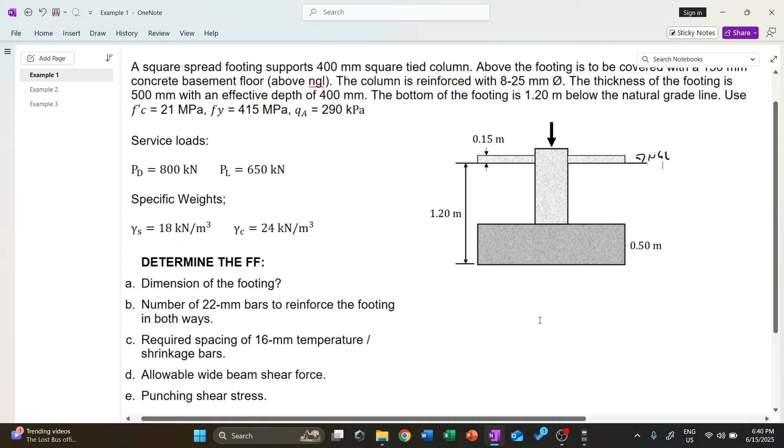For step number 1, we have to calculate first the effective pressure. To do that, we write: the allowable is equal to the effective plus the soil, the concrete, and the surcharge pressure. Given here is the allowable, 290 kilopascal. The effective is what we're solving for. The soil pressure we can solve.

We have 1.2 meters depth from the NGL to the bottom of the foundation, and 0.5 for the concrete. So we have soil with thickness of 1.2 less 0.5, or 0.7 thickness, which is 0.7 meter. So to get the pressure, that is simply gamma of the soil times the thickness of the soil. Gamma times height gives us kilopascal.

That is the pressure. Same with concrete: gamma of concrete times the thickness of the concrete. So let's substitute everything here. We have the allowable, 290, equal to the unknown effective plus the soil pressure, that is gamma of soil 18 times thickness of soil 0.7, plus gamma of concrete 24, thickness of concrete 0.5.

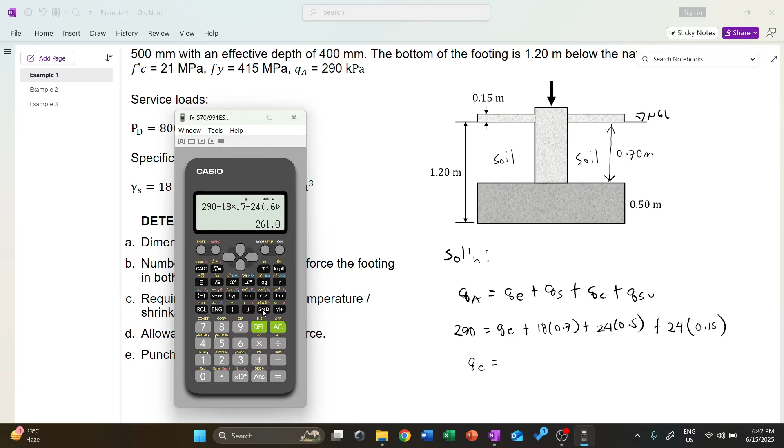So finally we can now solve for the value of the effective pressure. Let's substitute everything: 290 less 18 times 0.7, less 24 times - let me combine 0.5 and 0.15, so 0.65. Overall, we get 261.8 kilopascal.

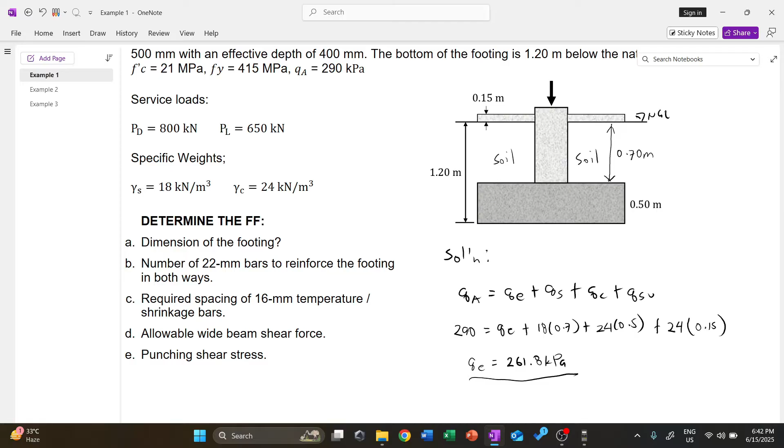261.8 kilopascal. So now we have the effective, and this is what we'll use to calculate the dimension of the footing. Now it says the footing is square, so we already know that side by side, S by S, will be its dimension. Now recall our formula for the area of the footing.

This is equal to the actual load divided by the effective pressure. Now again, our actual load here is the service load, since it's effective, it should be service load - meaning there should be no factor. So what are our loads or service loads? Given already: dead load is 800, then live load is 650.

So the area of the footing, let's call it S squared, since our footing is square, S by S. Then our service load is simply 800 plus 650, divided by 261.8.

261.8. Then, finally, we can get the dimension of our footing. So, the side is equal to what? We go straight to this: 800 plus 650 divided by the answer. This is simply the square root.

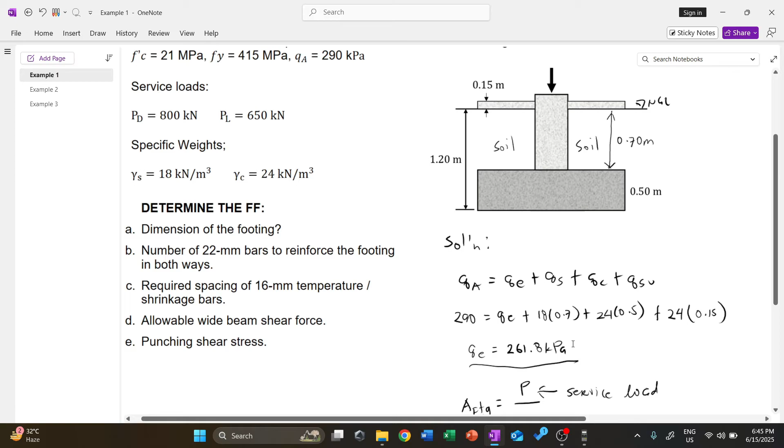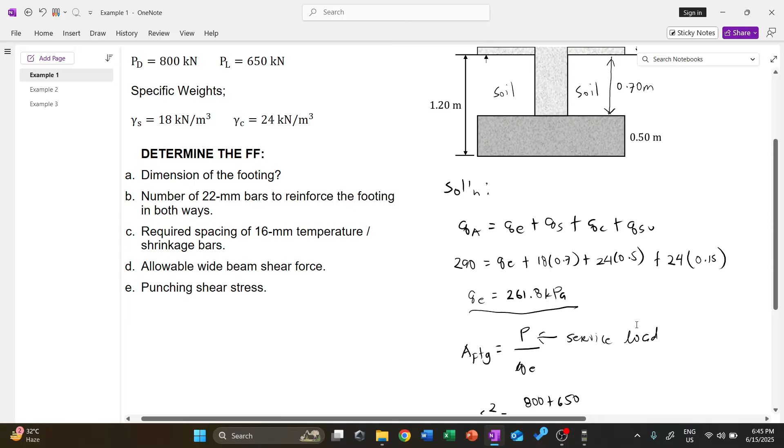Alright, next, the number of 22mm bars to reinforce the footing in both ways. So, step number 2 is to calculate the ultimate pressure that occurs here. This will have a QU pressure, if our actual load is PU here, if the actual load is at ultimate. So, solving for QU, let's put step 1 here, then step 2 on the other side. So the QU is simply ultimate load divided by the area of the footing.

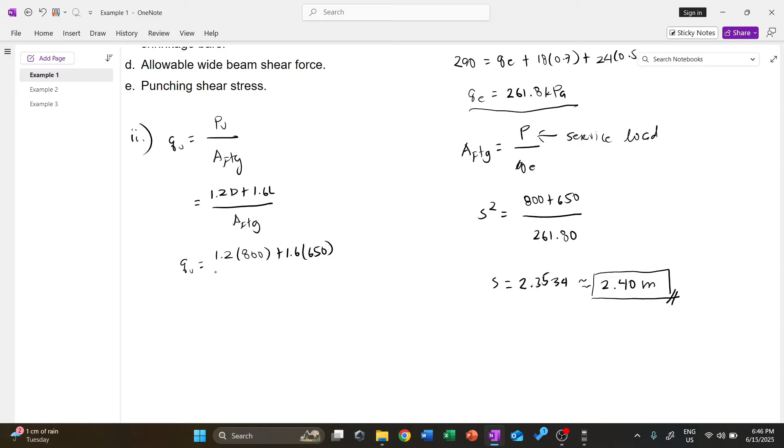So, our PU, to make it ultimate, is simply 1.2 of dead plus 1.6 of live, divided by the area of the footing. So our QU here is simply equal to 1.2 of 800 plus 1.6 of 650, then divide this by the area of the footing. Now, the area of the footing is not the original value, but the rounded one. Since we equated the dimension to 2.4 by 2.4, the area we'll use for the footing is of course 2.4 by 2.4, or simply this is now 2.4 squared.

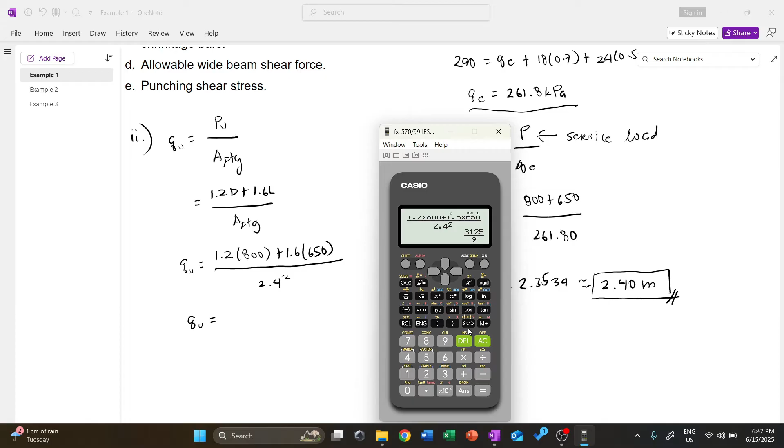So our QU depends on the final answer for the area. Now we have QU equal to, this is 1.2 of 800 plus 1.6 of 650, divide this by 2.4 squared. And then finally, we have 347.22, 347.22, this is in kilopascal.

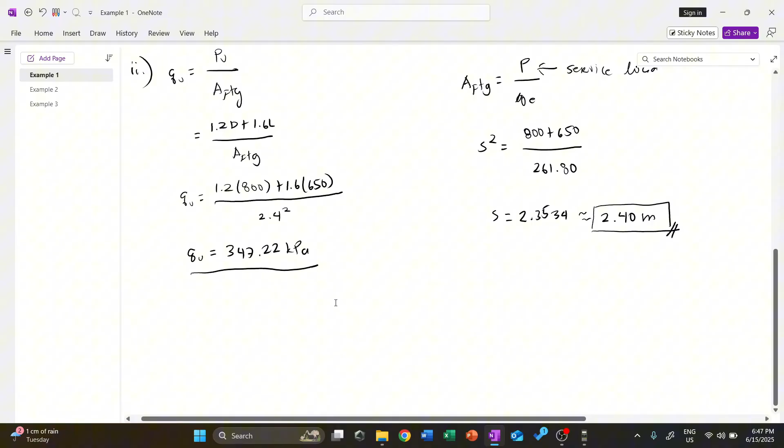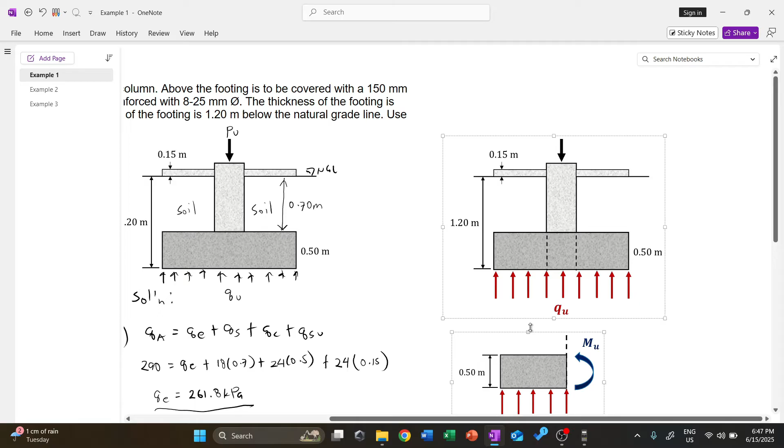So, for example, this is our QU. Let's just copy, or drag down rather. Let's put this in step number 3, so it's not hard to draw. Alright, so this is our QU. Let's put here the value, 347.22 kilopascal.

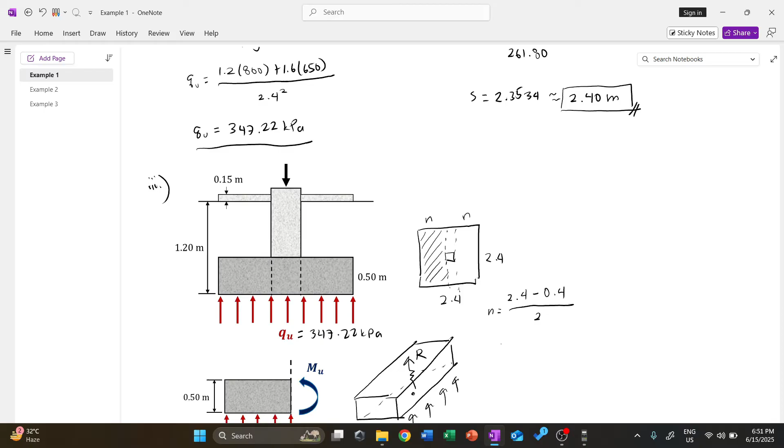Okay, so 2.4 less 0.4 dito, divide natin ng 2 dahil may n ka dito sa kabila. Actually, may n ka rin naman dito sa may kabila. So, divide natin ito by 2. So, 2.4 less 0.4, that is 2 divided by 2, that is now 1 meter. So, meron na tayo ditong n na 1 meter. So, again, ito yung side ng ating foundation. This is 2.4 meters by 1 meter.

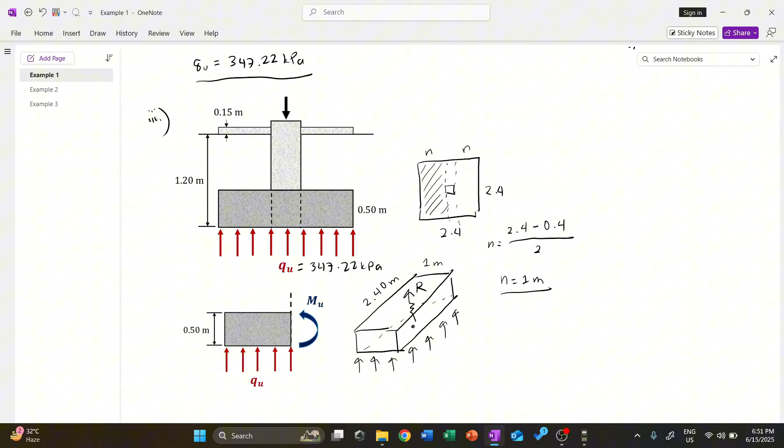Now, para makuha natin yung resultant, that is force, no? Okay, so for example, ito yung qu natin. We know that pressure or qu is simply equal to R divided by the area. Pressure is equal to force divided by area. Para makuha natin yung kanyang resultant. Okay, so R natin therefore is qu, that is 347.22 times yung area na 2.4 by 1 meter. Para makuha natin yung value ng resultant natin. Okay, so finally, pwede na natin kunin ang ating R, that is 347.22 times 2.4. Okay, so we have R 833.33.

833.33 kilonewton. Ito na yung ating resultant. Okay, now yung resultant na to, magmo-moment na yan dito sa ating critical section and then finally magkakaroon na yan ng MU. Okay, so dito po yung ating MU na yan. Kukontrahin ng MU natin yung resultant na yan. Okay, so yung R natin, saan ulit nag-a-act? Of course, nandito yan sa ating center.

Meron tayo ditong R. Alam natin na yung distance na to ay dahil nasa gitna yan, okay, nasa gitna po ng n over 2. Kanina nakuha na natin yung n, no? Yung 1. So kung n over 2 yan, dahil diyan nag-act yung ating resultant, therefore 0.5 yung kanyang eccentricity from our critical section. And then finally, pwede na natin kunin, no, yung MU natin. Okay, so yung mu natin dito is simply R times n over 2. Okay? So, nagmo-moment lang yung r natin dito sa ating critical section.

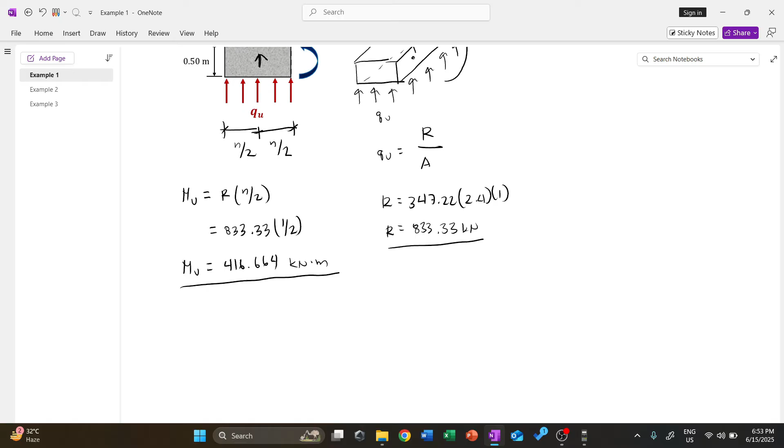R times n over 2, yung kanyang moment arm. Okay, so 833.33 times 1 over 2. 1 meter divided by 2 or 0.5 meters. So, finally, meron tayo ditong mu, na equal to 416.66. Okay, or lagay na lang natin lahat, 416.664 kilonewton meter. Okay? So meron na tayo ditong mu.

And then yung step number 3 natin or 4 rather, no? 4 na lang siguro. Diretso na natin. Skip na natin yung sa may checking of kung adequate ba yung ating section o hindi. Assume natin adequate ito. Tapos bakalan lang natin, hindi naman tinatanong dito sa problem. Okay, so yung ating mu, na-solve na natin.

Okay, step number 4. Solve na natin yung process. Mu is equal to phi Mn, ganito lang yan, di ba? Tapos, yung Mn natin dito is actually equal to 0.85 f prime c times AB, yung malaking b times d minus a over 2. Tapos makukuha na natin yung a dito. Now, idiretso na natin yung Mn natin dito, gawin na nating mu over phi. Pwede natin sabihin this is mu over phi is equal to 0.85 f prime c AB times d minus a over 2.

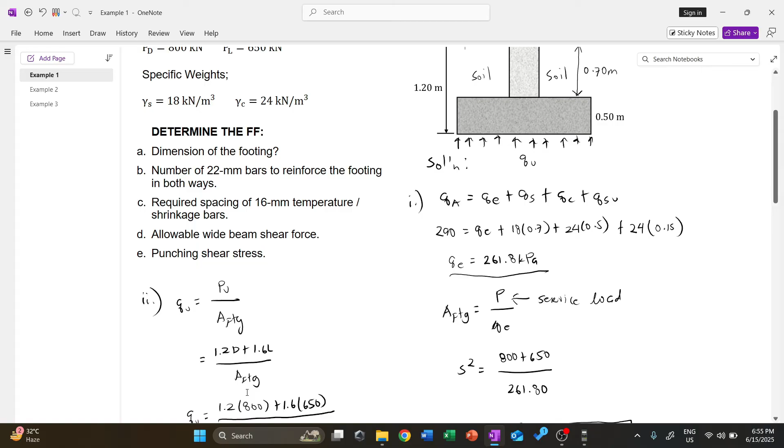Now, yung mu na natin dito, pwede na nating i-substitute everything. So, 416.664. Now, dapat ito ay naka-Newton mm, so gawin natin tong times 10 raised to 6. Divide this by phi natin dahil laging tension controlled. 0.9 is equal to 0.85, f prime c natin. Anong binigay? F prime c is 21, Fy is 415.

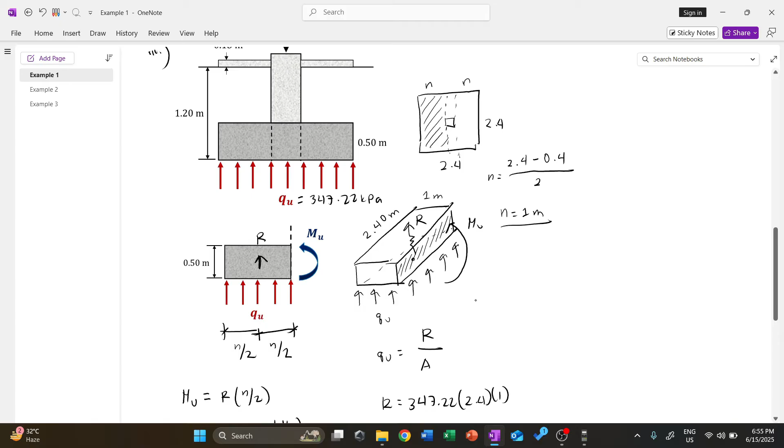F prime c is 21 times yung A natin is syempre unknown, no? Unknown yung A, and then ano yung B natin dito? Yung B natin dito is of course itong 2.4. Ito yung subject, ito yung babakalan natin. So therefore, yung width nito ang kukunin natin, which is yung 2.4. Okay, or gawin natin tong 2,400, para mm lahat din yung ating dimension.

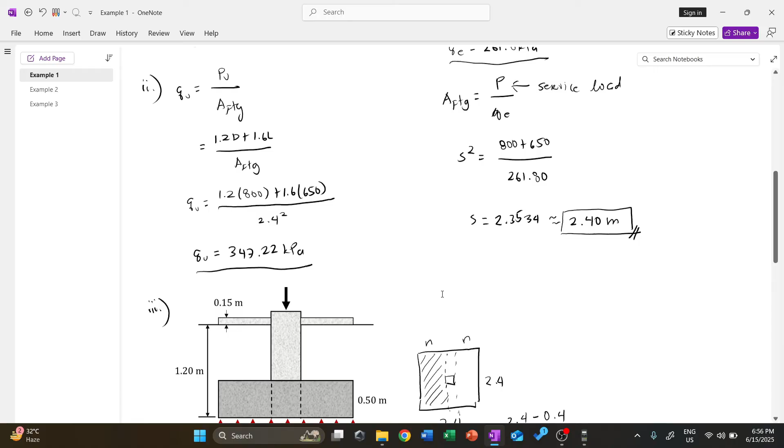Now, yung effective depth, ano bang binigay dito? Kapag may sinabing effective depth, yun yung gagamitin natin all throughout. Ang effective depth natin dito na given ay 400. Kung ano man ang tanungin, kahit ano lang ang tanungin, mu, one-way shear or punching shear, isang effective depth na lang yung gagamitin kasi may binigay na yung problem. So, this is now 400 less A over 2. Then, finally, pwede na natin kunin ano ba yung A natin rather.

Isimplify ko lang muna ito: 416.664 times 10 raised to 6, divide this by 0.9. Tapos yung side na to, i-divide ko lahat ng 0.85, 21, 2,400. Ilalagay ko na dito sa baba: 0.85 times 21 times 2,400. Ito, 0.85, 21, 24, nilagay ko dito sa left term or left equation. Tapos store ko to sa A na lang.

Recall natin yung value ng A, para simplified. Tapos meron akong unknown na X, alpha X times 400 less 0.5 of X, or yung X over 2. Yung A natin in-store ko na kanina sa mga constant, tapos X yung unknown. So pwede na natin tong i-shift solve.

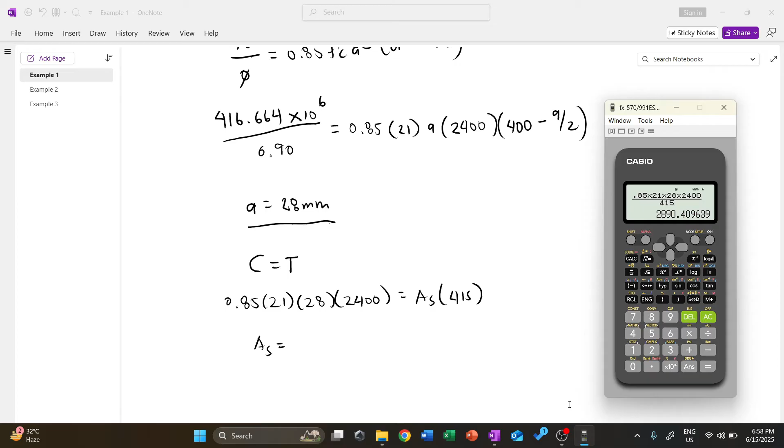2890.41 mm square. Now, is this the final answer? Of course, hindi pa. We need to check if pasok ito sa ating minimum. Dapat ito ay greater than our minimum.

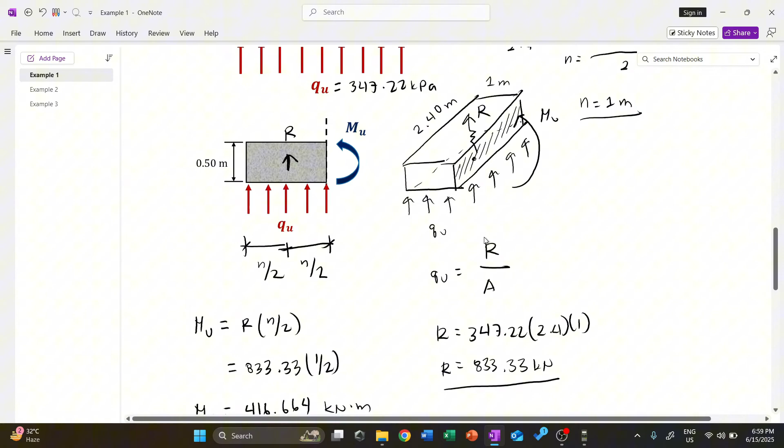Yung AS min natin for FY less than 420, you recall, this is 0.002 area gross. Again, this is for FY less than 420 megapascal, at 415 yung ating FY, so ito yung gagamitin natin na formula. This is 0.002, gross ito. Saan yung tinitingnan natin dito na section? Yung tinitingnan natin dito na section ay yung naputol na section.

Yung thickness natin ay given na rin kanina, 0.5 by 2.4. Yung area nitong naputol ay 2.4 by 0.5, that is the gross section. Gawin lang natin dito, that is in mm pa rin naman, 2,400 by 500, gross area. So our minimum here is equal to 0.002 times 2,400 times 500, 2,400 mm square.

Kung gagamitin natin yung pang board exam, dalawa yun di ba. Wag natin gamitin tong board exam, no, kasi...

Ayan, so pwede naman gamitin yung board exam or kayo bahala, no, choice nyo. Yung AS min natin for board exam, this is equal to 1.4 over FY BD, or yung isa naman is square root F prime C over 4 FY BD. Kailan ginagamit yung isa? So sabi dito, whichever is greater. May one way naman, may shortcut para malaman kung ito yung gagamitin natin na formula if ang F prime C natin ay

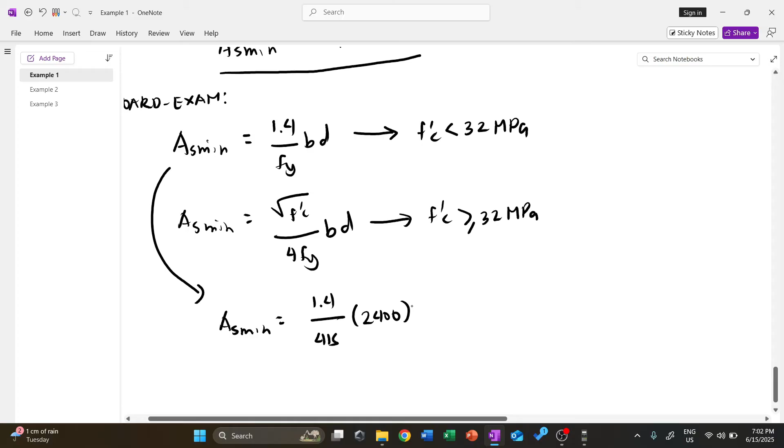So sinang F prime C natin ay less than 32, 21 MPa yung ating F prime C, so ito yung gagamitin natin: 1.4 over FY BD. Ito yung mag-govern. AS min natin dito is 1.4 over FY, that is 415, times B natin, that is 2,400, yun yung width, times D na to. Hindi na siya yung gross kanina, kanina gross ito 500, now effective depth na lang D. Yung effective depth natin ay 400.

Yung AS min naman natin para dito is equal to, laging mas malaki talaga to, 1.4 over FY times 2,400 times 400. So 3238.55 mm square.

Ayan, so kung magbo-board exam ka, ito yung gamitin mo, kasi ito yung talagang ginagamit sa board exam. Sa real life din, pwede mo na itong gamitin, kasi mas malaki talaga yung binibigay niya as compare dito sa kabila. Although ito yung nakalagay sa code natin, ang pangit naman kung ibabypass natin yung code natin.

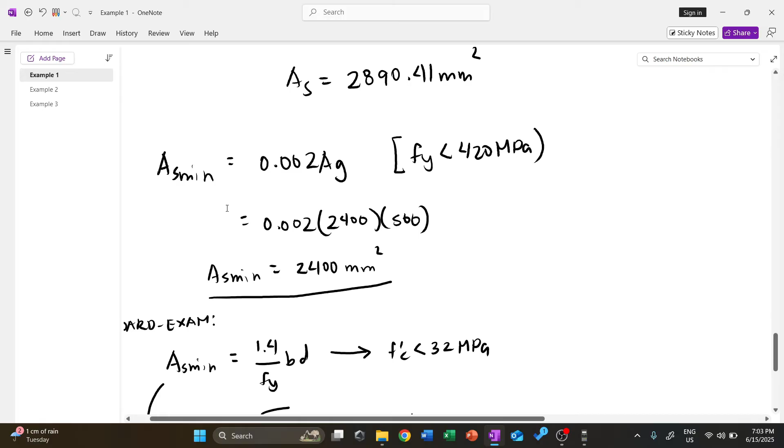Pero, well, kung gusto nating mas safe yung ating structure, why not we choose the better, no? Itong mas malaki. Okay, so sige. Ito, 2.4 versus 2.8, ito talaga yung mag-govern, 2.8, kung yung code ang i-follow natin.

Pero kung yung board exam, 3238.55 is greater than AS. Okay, so sige, practical na lang siguro tayo, no? Yung mas malaking area na lang yung i-consider natin.

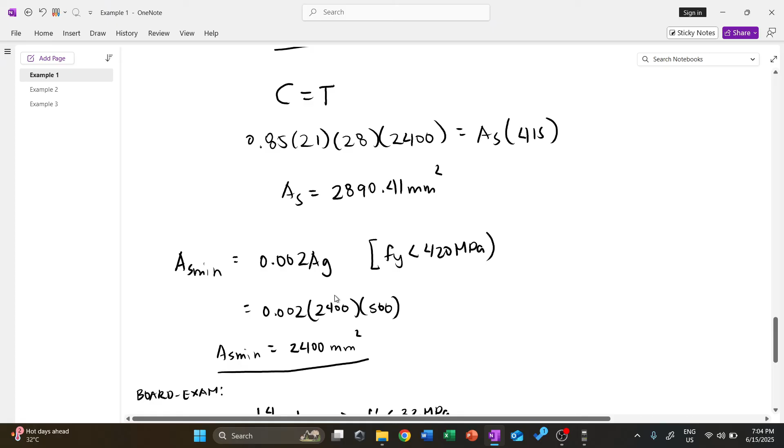Okay, so sige, board exam yung gagamitin natin. Okay, so AS min, ito yung mag-govern dahil itong 3238.55 ay mas malaki kaysa kay 2890.41. Okay, so ito na yung gagamitin natin. Board exam na lang, para mas madaming bakal.

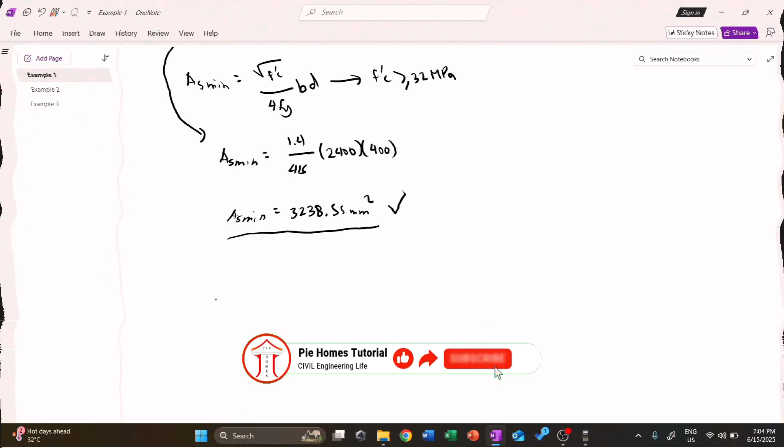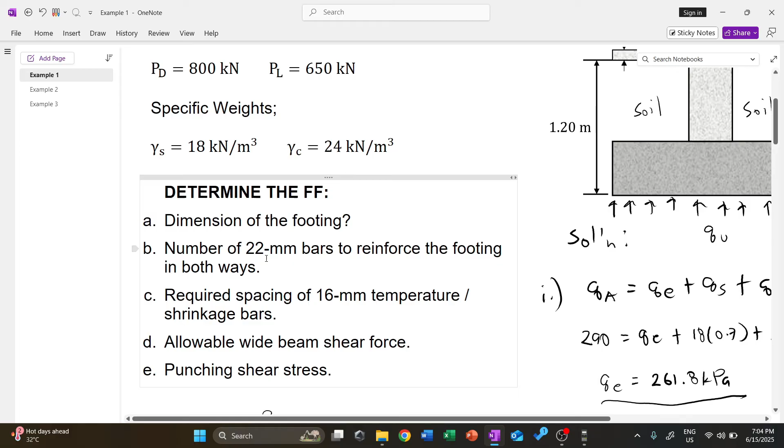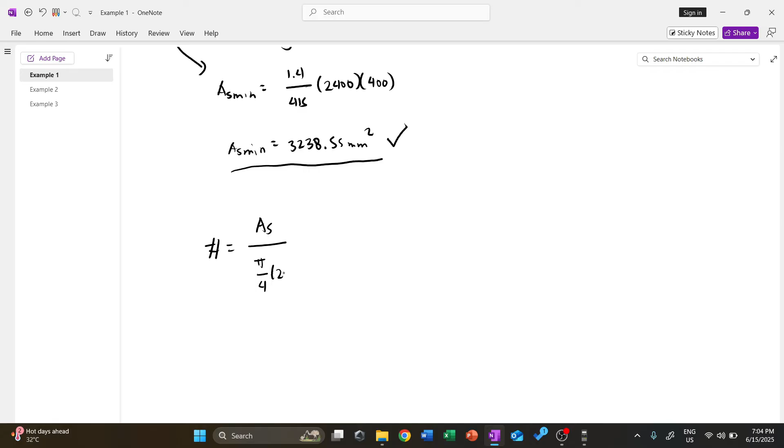Okay, so yung tanong sa letter C or letter B pa lang pala tayo. How many 22 mm bars to reinforce the footing in both ways? Okay, so to calculate the number of rebars, this is simply equal to area of the steel divided by area of 1 bar. Okay, so yung area of 1 bar, that is pi over 4 times 22 square. Again, area of the steel divided by area of the required rebar.

Okay, so yung gagamitin natin na area is 3238.55. Divide this by pi over 4 times 22 square. Now, the number of bars here is equal to answer divided by pi over 4, 22 square. Alright, so 8.52, or kahit 8.5 na lang, okay lang naman dahil always round up lang din naman ito.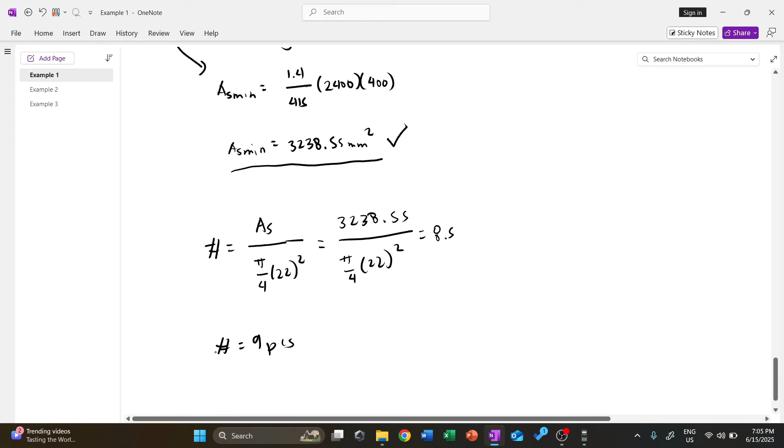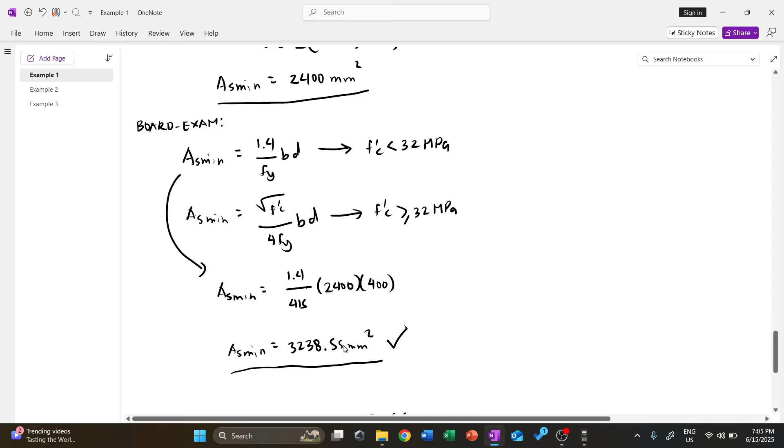Okay, so hindi naman pwede ang 8.5 na bakal, so we make it 9 pieces. Alright, so ito yung sagot natin sa ating letter B. Okay, sa board exam, ito na yung gamitin natin. And practically, sa totoong buhay, ito na lang din yung gamitin natin dahil mas madaming bakal nga naman talaga, no? Okay, so that's letter B.

And next, for letter C naman, required spacing of the shrinkage, o yung top bar daw natin, if 16 mm yung ginamit. Okay, this is square footing. Alright, so sabi natin sa rule, ang bakal natin sa baba, kapag square footing na two-way, ang bakal natin sa baba ay equal sa taas.

Okay, so kung meron tayong 9 pieces sana sa bottom, this is actually bottom, main bar ito. Dapat meron na rin tayong 9 pieces para sa itaas. Kaya lang, mag-i-equal lang sila na 9 pieces by 9 pieces kung pareha sila ng diameter. Since yung tanong sa letter C, ginawa natin dito, instead na 22 mm daw yung gamitin natin, what if palitan natin ng 16 mm yung ating rebar?

Okay, so to do that, ito lang yung gagawin natin. We know that yung area ng steel sa baba dapat ay equal sa top. Okay, so ano yung area natin sa bottom? Yung area natin sa bottom, yung nag-govern kanina ay 3238.55. So equate lang natin yan dito.

3238.55 is equal to area of the top. Okay, so yun na yung gamitin natin, area ng top, AS top. So dapat equal sila. Okay, and then yung top natin, sige, ganyan na lang. So dapat pareha sila. Alright, so para makuha natin yung number of rebars dun sa top, gawin natin, of course, area nung top divided by pi over 4, yung required, 16 square.

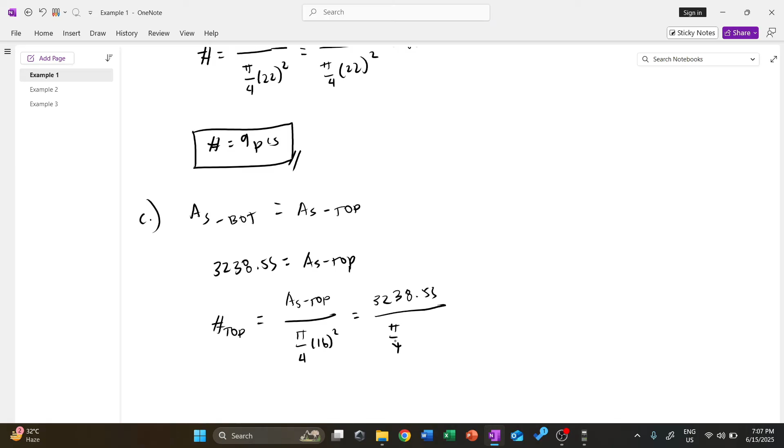Okay, so 3238.55. Divide this by pi over 4, 16 square. Okay, gives us equal to what? 3238.55 divide this by pi over 4, 16 square. And 16.11, okay, or 16.10.

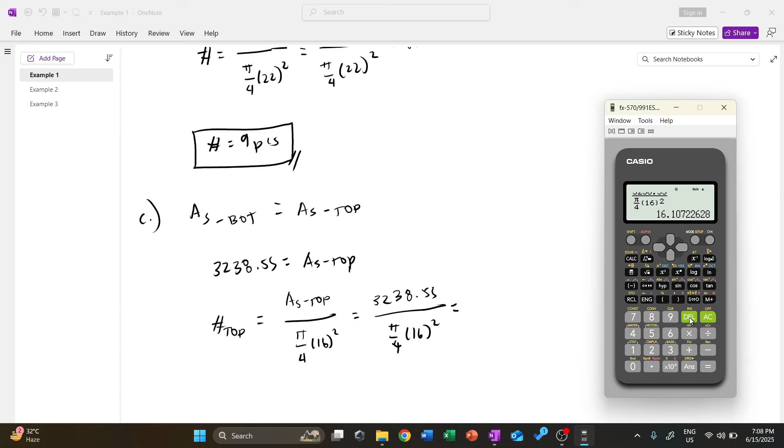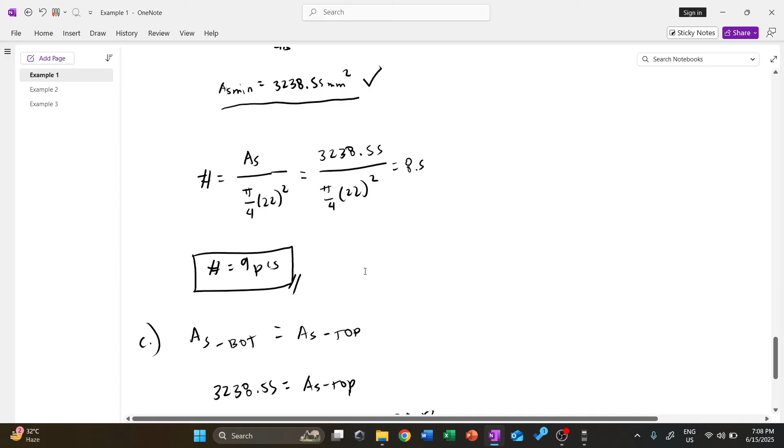Okay lang naman, 16.10, and then of course round this up. Yung top natin dapat round up lagi niyan. Lagi yan, so 17 pieces. Hindi pwede yung 16 point something. Okay, so yung number of 16 mm sa top, kapag pinalitan natin yung size niya, instead of 22, ginawa nating 16, magiging 17 pieces na. Yung 9 pieces naging 17 pieces. Okay, just adjusting the diameter. So this is letter C.

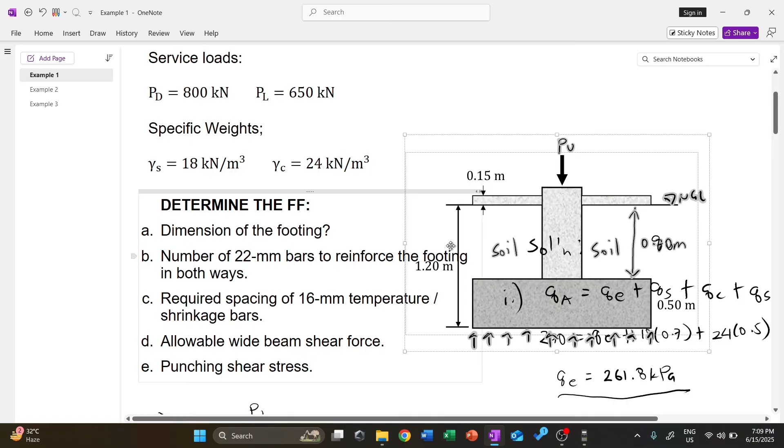Next, letter D naman. What is the allowable wide beam shear force? Okay, so we have to locate the critical section for the wide beam. Okay, so again, ang sabi natin, ang location ng critical section for wide beam. Okay, copy natin to, for letter D.

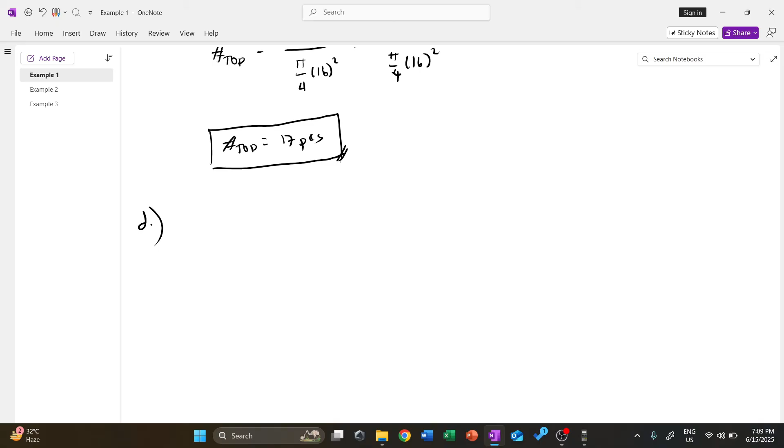Ayan, so burahin lang natin yung iba dito.

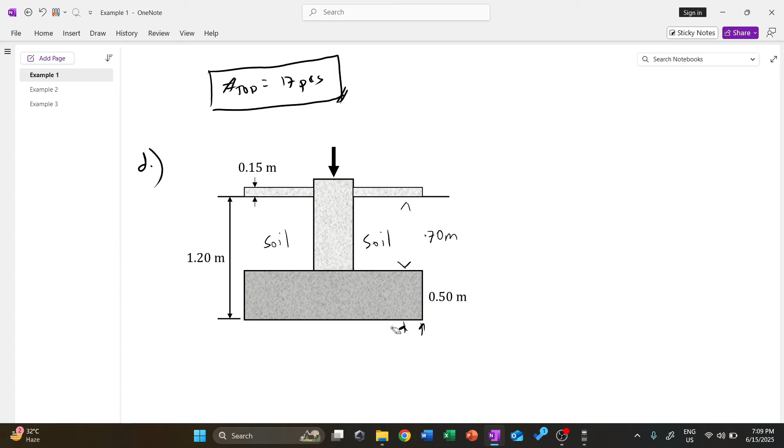Alam natin na kapag nilolocate natin yung critical section for wide beam, isukatin natin kapag wide beam, the distance from the face of the pedestal or the column. Or pwede rin naman the distance from the location of MU. So nataon naman na ito yung MU natin dito sa location na to, so pwede natin dito sukatin na lang the distance. Ito yung critical section natin for wide beam, tawagin natin to na X distance na lang.

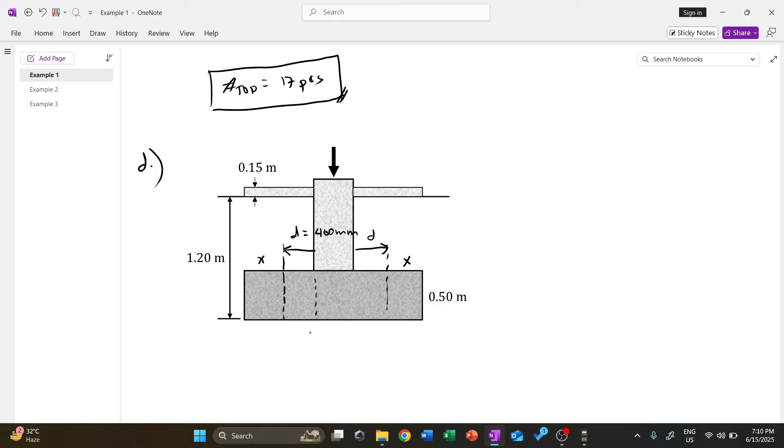Yung D natin again is constant na 400 mm, binigay naman na yun ng problem natin. Effective depth distance, 400 mm. Kung 400 mm ito, paano natin isolve yung X distance dito? Meron din tayong D ulit dyan, and then meron ka ulit X dito. Yung total width ng ating footing is 2.4 meter.

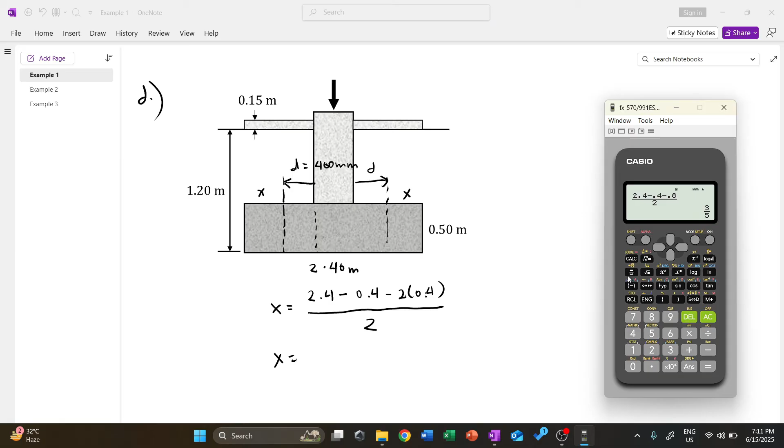So to solve the value of X, this is simply equal to 2.4, yung total width, ilas lang natin yung column dimension minus dalawang effective depth. Both side may XX tayo, or divide this by 2. So ito yung magiging value ng ating X. 2.4 less 0.4, less dalawang 0.4 ulit, or 0.8, then divide this by 2. Ang ating X is 0.6 meters.

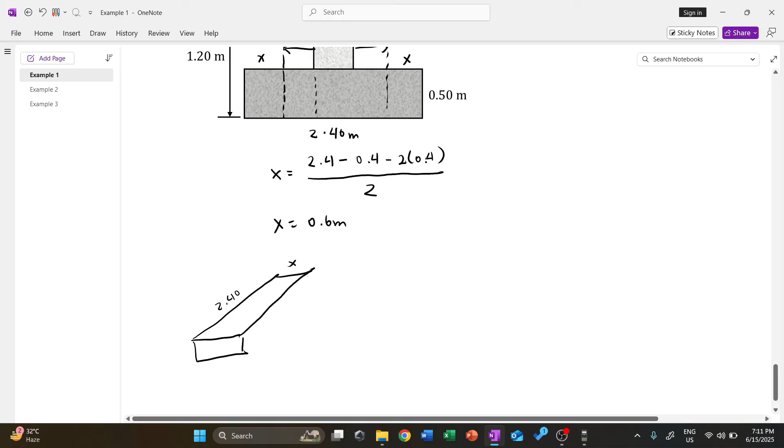0.6 meters. Ito na yung magiging section natin for our punching, our wide beam rather. Ito yung X natin, tapos meron pa rin tayo ditong 2.4. Ayan na, so yung X, meron pa rin tayo ditong QU of course. Yung QU natin, nag-a-act pa rin yan dito sa may ilalim natin. And then ang tanong pala dito is, ano daw yung allowable wide beam shear force natin.

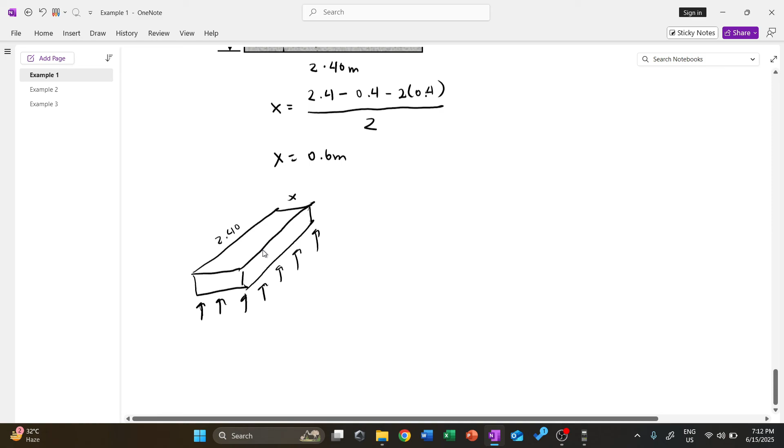Kapag allowable, again, hiramin lang natin dahil shear force lang naman yung tinatanong pala dito. Ito lang yung VC. Yung VC natin is 1/6 lambda square root F prime C BD. Ayan, bakit pa natin pinutol-putol pala? Anyway, solve na lang din natin mamaya yung stress, follow-up question na lang. So 1/6 lambda square root F prime C BD.

B, o pwede rin naman to capital B, whatever, okay lang naman, same lang. 1/6, walang binigay na lambda. Hindi sinabi kung normal weight, sand-lightweight, or all light weight. We always assume na normal ito, so 1 yung ating magiging lambda. Then F prime C natin ay 21. At yung B natin dito, this is 2,400, yun yung width ng ating footing, times the effective depth na 400.

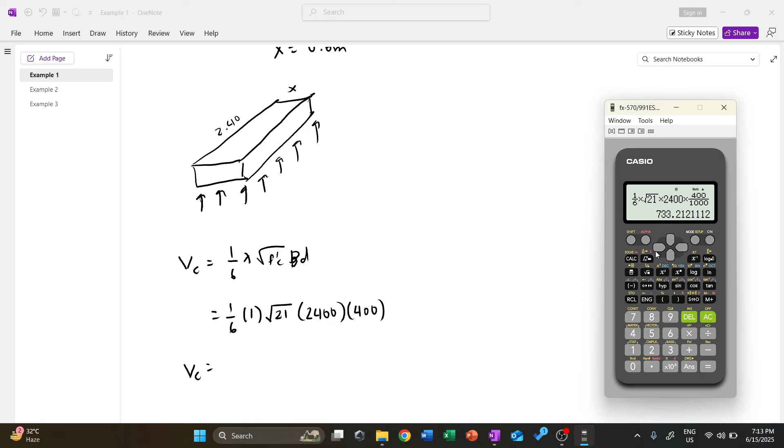Ang masosolve natin dito ay Newton, so divide this by 1,000 to make it kilonewton. Gawin natin dito: 1/6 times square root of 21, times 2,400 times 400, and then divide this by 1,000 lahat para maging kilonewton. So 733.21.

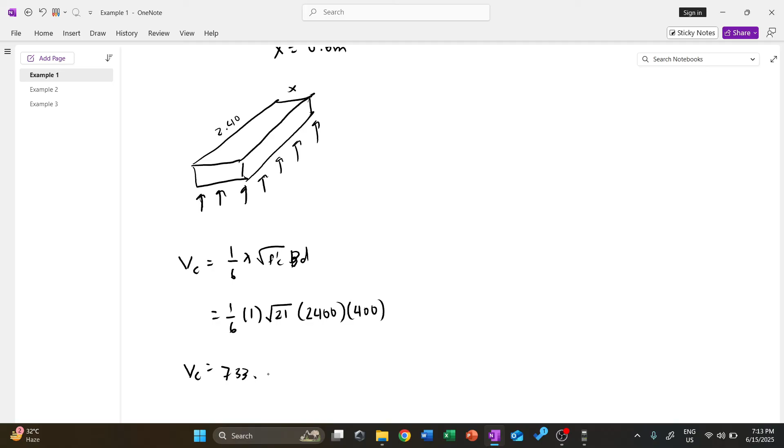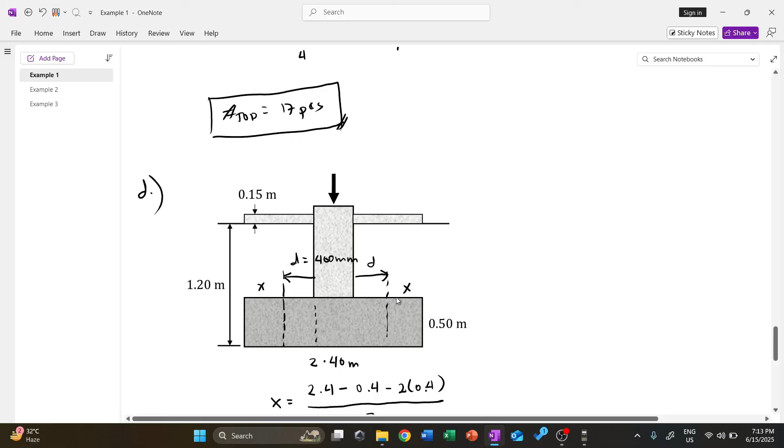733.21 kilonewton. Dahil force lang naman pala yung tinatanong dito, check natin, ayan, allowable shear force lang naman. Ito na yung allowable shear force natin. Force, so ibig sabihin kilonewton. Kapag stress, dapat kilopascal. So this is our answer for letter D.

Follow up na lang siguro, what if ang tinanong dito ay allowable shear stress, o allowable wide beam stress. Again, yung shortcut natin, kapag stress is, gagawin lang natin, tanggalin lang natin, o hiramin lang natin yung formula ng allowable, tapos tanggalin lang natin yung area, yung B times D. Yung allowable wide beam natin dito is simply equal to 1/6 lambda square root of F prime C. Wala nang BD, tanggalin lang natin yan. Kung gagawin natin yan dito, balik lang natin.

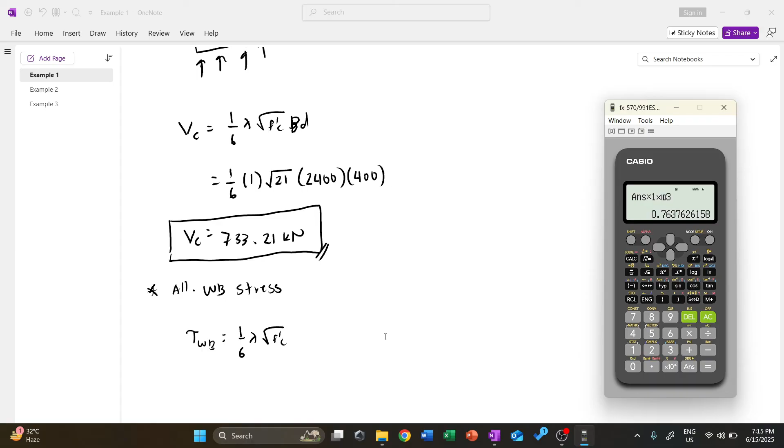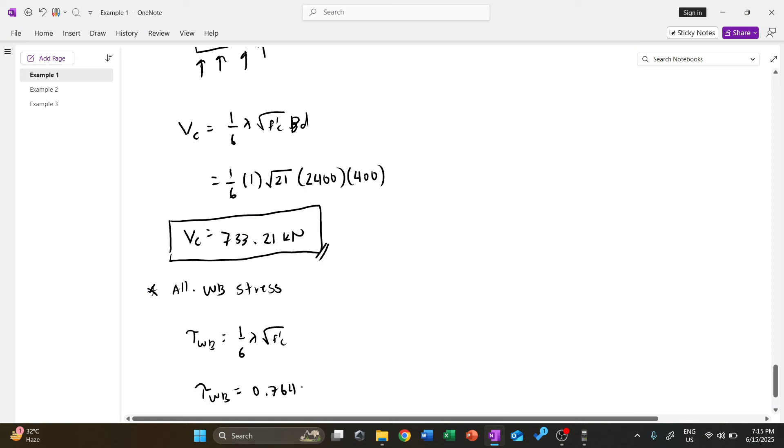Answer divided by 2,400 times 400. Ayan, oops, tapos mag-times 1,000 pala, so times 1,000 ulit, ibalik natin yung 1,000 syempre. Ang makukuha natin dito ay 0.764. Ayan, 0.764, tau wide beam or shear wide beam natin ay 0.764 megapascal, MPa.

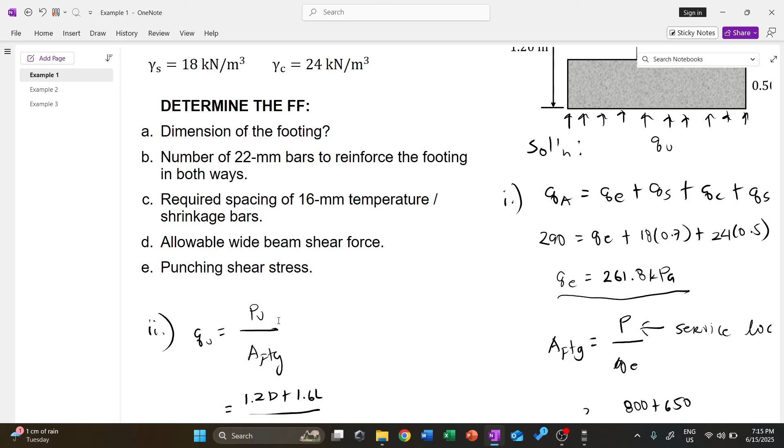Follow-up question lang, and then the last one, yung letter E. What is the punching shear stress? Ayan, walang ginamit na term na allowable. So hindi natin pwedeng gamitin yung formula tapos tanggalin lang yung area. Instead, kapag punching stress o critical punching shear yung tinatanong na sa atin dito, ang gagawin natin ay, of course, kunin natin yung VC in terms of the VU. So VU is equal to phi VC.

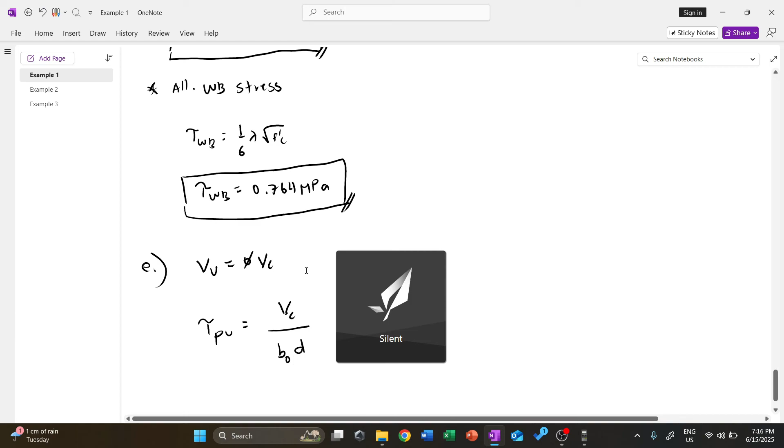Dapat ang punching natin dito ay equal to, alam natin na ang punching ay shear force of concrete divided by, dahil punching ito, perimeter of the section times the effective depth. Pero ang gagawin natin dito ay, of course, in terms of VU dapat yung VC natin para maging critical, hindi siya allowable. Hindi mo pwedeng gamitin yung diretso na formula ng VC na allowable. Instead, gawin natin itong VU, by this formula: VC is equal to VU over phi. VU over phi BOD, again this is the perimeter of the section times the effective depth. Paano kaya natin yun malalaman?

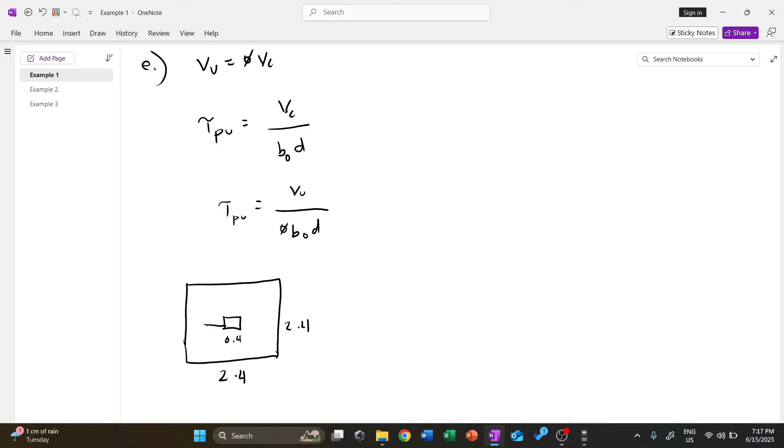So this is 2.4 by 2.4, and this is 0.4 by 0.4. To measure the critical section, we need d over 2 distance from all sides. That's the rule: d over 2 all throughout the side.

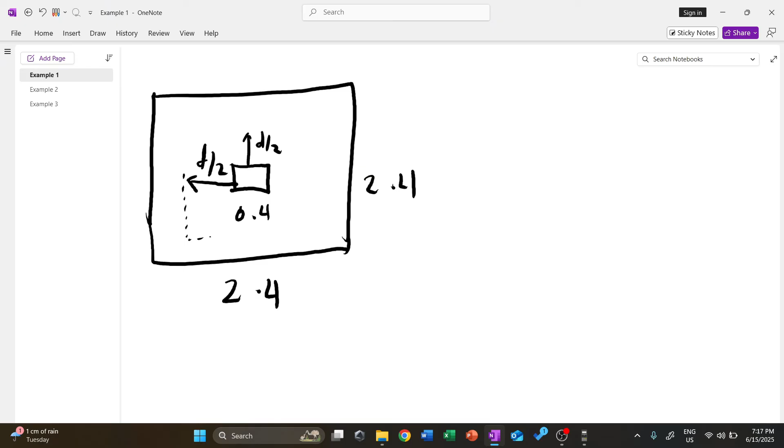So d over 2 here, d over 2 there - left and right, then top and bottom, d over 2. Then let's make the critical section here.

So for example, this is the section. Let's fix this up - this is what gets cut off in our section. Let's call this x distance and this y distance. Since our column is square, our critical section will also be square, so BO is simply twice of x plus y.

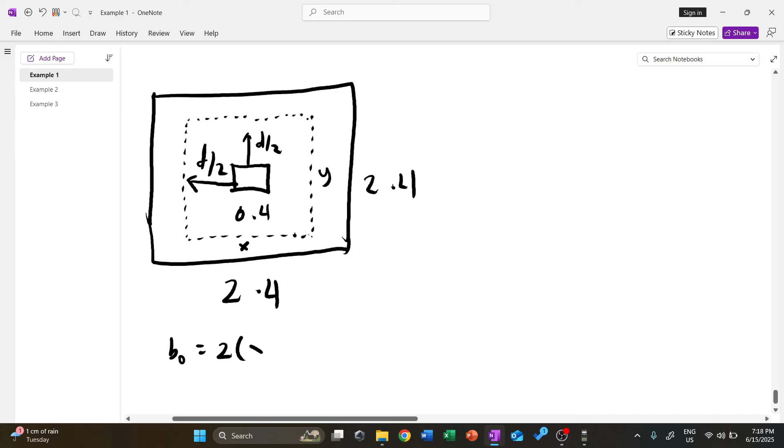Now, what is the value of x? Take note that x is equal to y. We have one column plus d over 2 on the left plus d over 2 on the right, or simply column dimension plus twice d over 2. The 2 cancels out, so simply column dimension plus d - that's the shortcut.

Again, x is equal to y. So x now is 0.4 plus 0.4. Our effective depth is also 0.4 in terms of meters. So x is 0.8 meters, and y is also 0.8 meters.

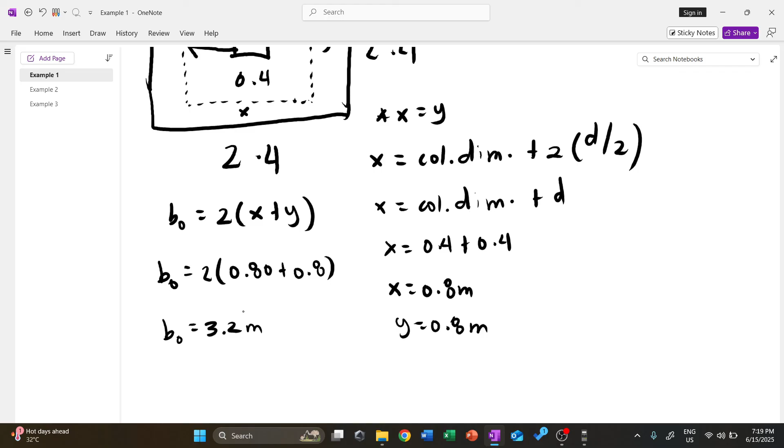Now ultimately, we can calculate our critical perimeter: 2 times 0.8 plus 0.8. BO equals 1.6 times 2, that's 3.2 meters. So now we have BO, and we can use our equation here.

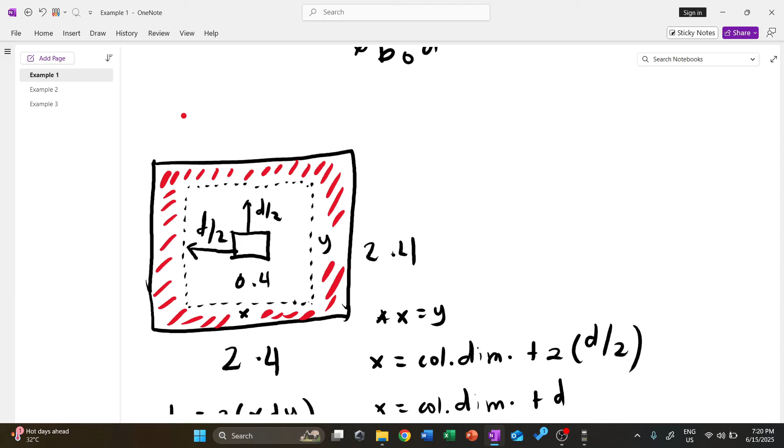So how do we get the area shaded? To get it, we use the area of the footing. The area of the footing is simply equal to the area shaded plus the area of what gets removed, which is x times y. So the total footing area equals the sum of the shaded part plus the inside part, which is x times y.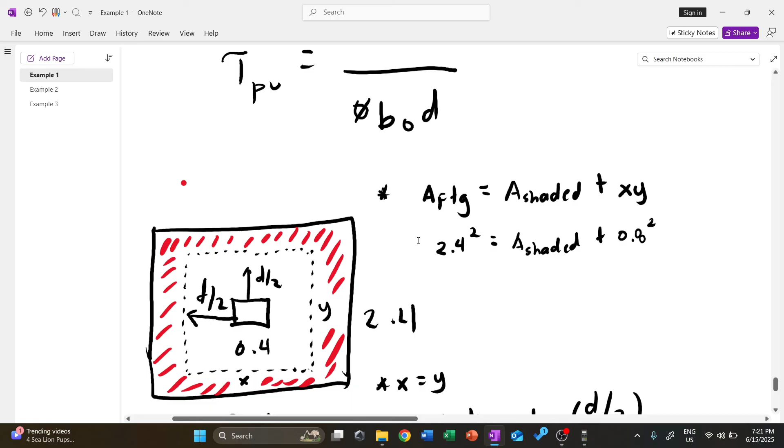So the footing area here is 2.4 squared, equal to area shaded plus x times y, which is 0.8 by 0.8. Our x is 0.8, our y is 0.8. Therefore, the area shaded equals 2.4 squared minus 0.8 squared.

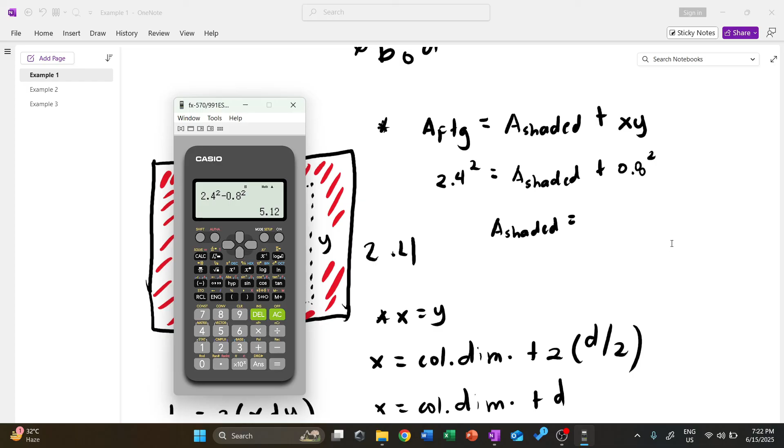So we get 5.12 square meters. All our dimensions are in terms of meters, so that is our area shaded - 5.12.

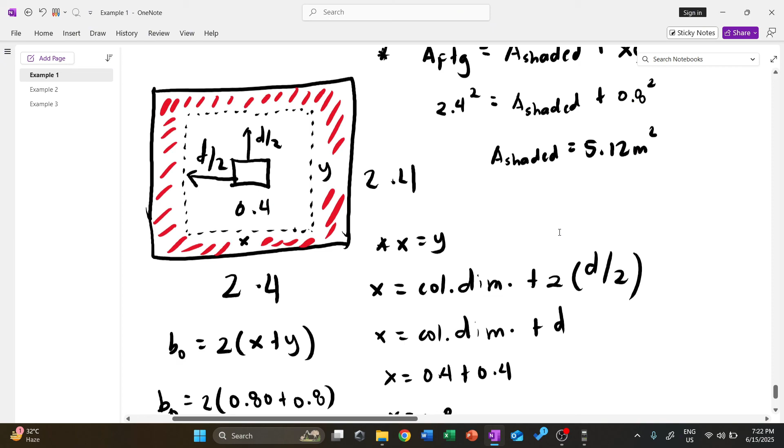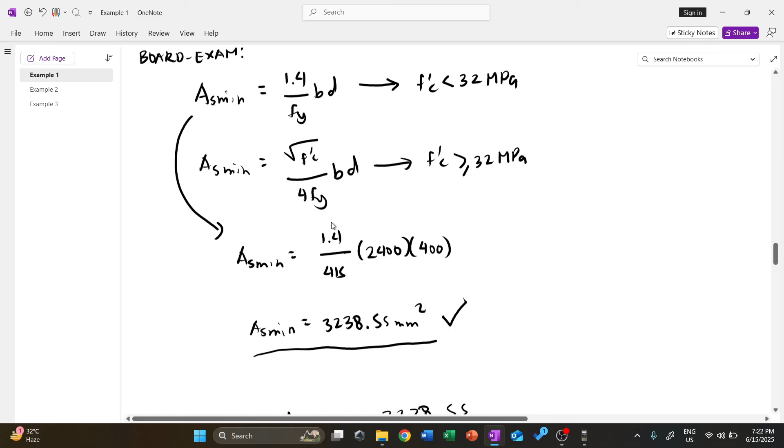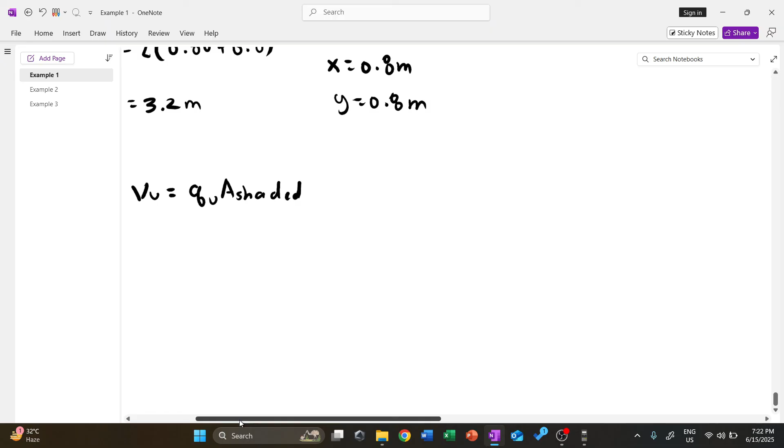Now our QU, let's go back to that - equal to 347.22 kilopascal, or kilonewton per square meter. Times the area shaded, also in square meters. So VU here will be in kilonewton. Multiply 347.22 by the area shaded, we get 1777.77.

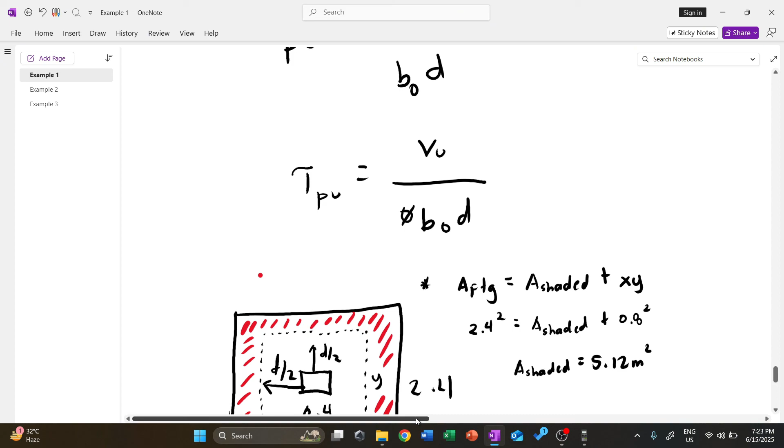1777.77 kilonewton. So now we have VU, and we also have BO, and everything is already set. Let's go back to this.

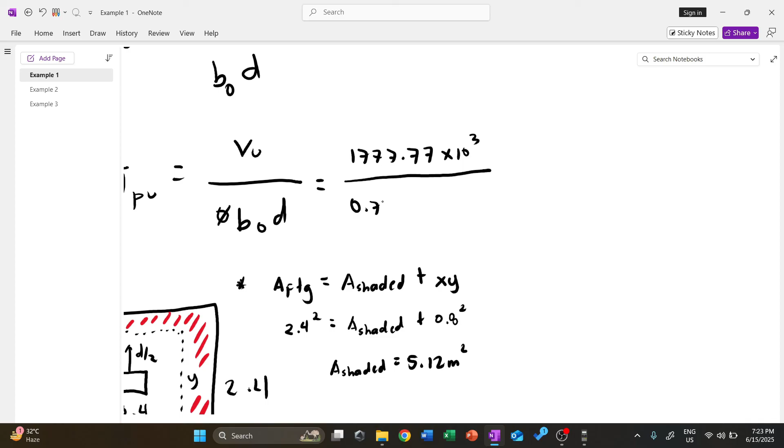Let's convert 1777.77 to Newtons first, so we can get MPa. Let's convert to Newton per mm squared first to get MPa. Our phi here is 0.75. Our BO is 3.2 - let's convert this to mm, so 3,200, times our effective depth of 400.

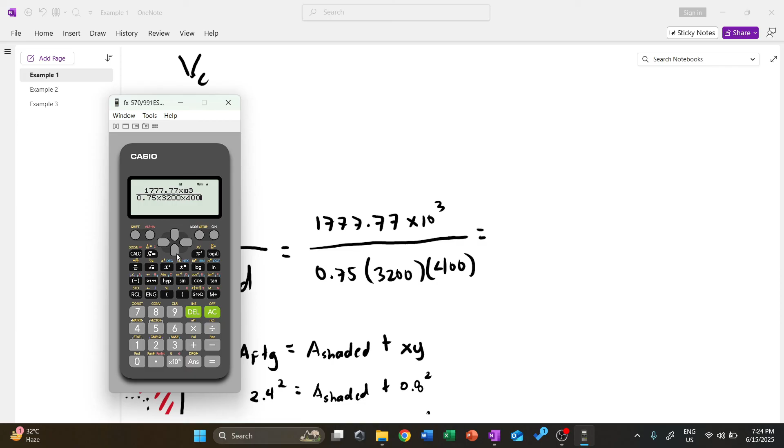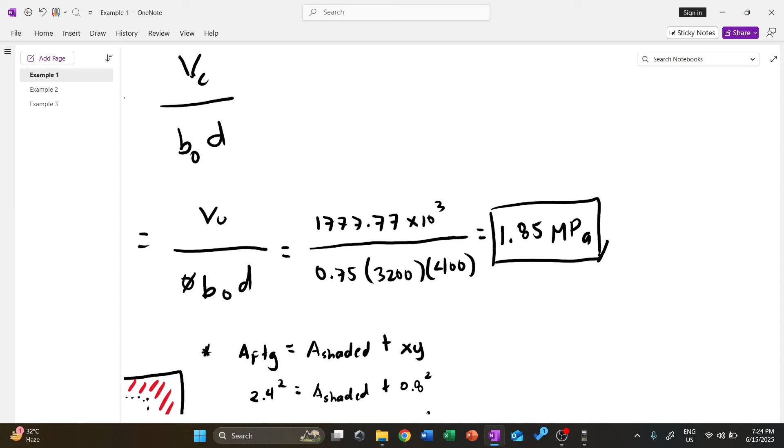And then we can compute: 1777.77 times 10 raised to 3, divided by 0.75 times 3,200 times 400. So we get 1.85 MPa - 1.85 megapascal. That's our example number 1.